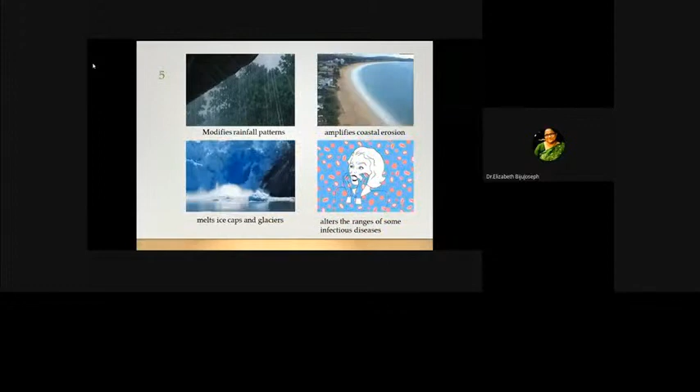Which are the primary greenhouse gases responsible for global warming? Water vapor, carbon dioxide, methane, nitrous oxide, and ozone. The larger the global warming potential, the more a given gas warms the earth.

Anthropogenic emissions of water vapor are small compared to the large evaporative emission of water vapor from the ocean. Methane, nitrous oxide, and ozone have a much larger global warming potential than carbon dioxide. Then why is carbon dioxide so important? It depends on how long it stays—the period the gas is present in the atmosphere. Carbon dioxide stays for thousands of years, unlike the other gases. Therefore, its concentration at a given time increases in the atmosphere as man-made emissions happen.

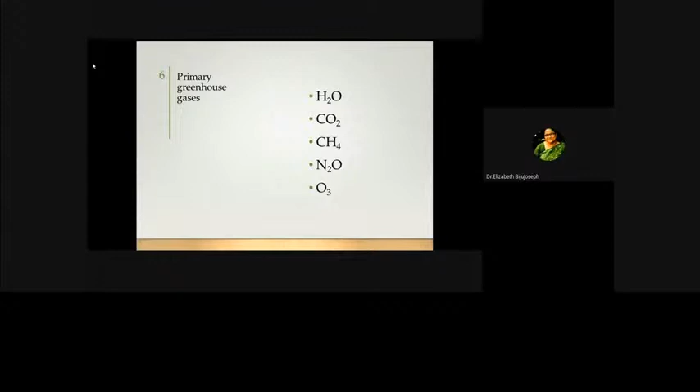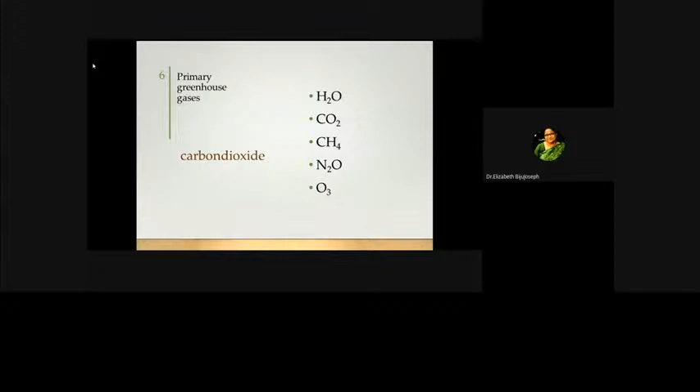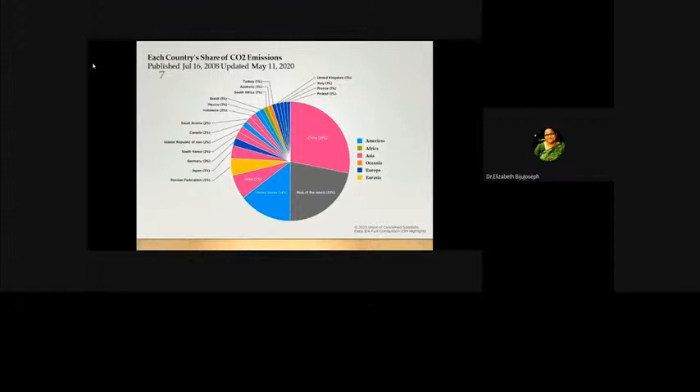Today, we are going to focus on carbon capture from industrial emissions as a way of mitigating the concentration of carbon dioxide in the atmosphere. What are the sources of industrial emission of carbon dioxide? Carbon dioxide is emitted from large stationary sources.

The largest single source of carbon dioxide is conventional coal-fired power plants. Cement manufacture emits around half a ton of carbon dioxide for every ton of clinker. What about refineries? For a 300,000 barrels per day refinery, the carbon dioxide emissions are in the range of 0.8 to 4.2 million tons per year.

The iron and steel industry is one of the largest energy-consuming manufacturing industries. Energy again has to be highlighted—for every ton of steel, around 1.8 tons of carbon dioxide is emitted. Therefore, much effort has been put into the development of technologies for the capture of carbon dioxide from process streams.

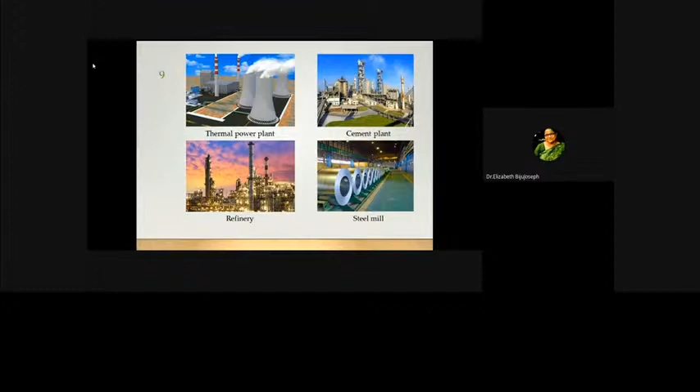The products of combustion of coal from the power plant - we need to prepare steam and to vaporize or evaporate water. The process requires energy, and the energy is supplied from the combustion process. The flue gas, the product of combustion, carries a large amount of energy.

After the energy transfer to the power plant, in the economizer, then the evaporator, the superheater, and finally the air heater, the flue gas which leaves the power plant carries around 14% carbon dioxide. There are other gases along with it.

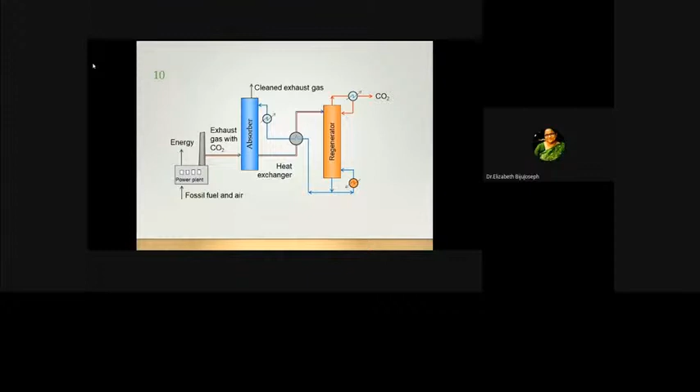This is how an absorber regenerator system would look like. This gives you an idea of the shape and size of the system.

Now let's look at the solvent or the absorbent that can be used. How is it regenerated? As I said a while ago, the most common method is by heating it.

Which are the solvents that I will be using? The solvents may be classified as physical solvents and chemical solvents. What is a physical solvent? A physical solvent is a solvent which absorbs the carbon dioxide without having any chemical reaction, which means the operation is purely physical absorption.

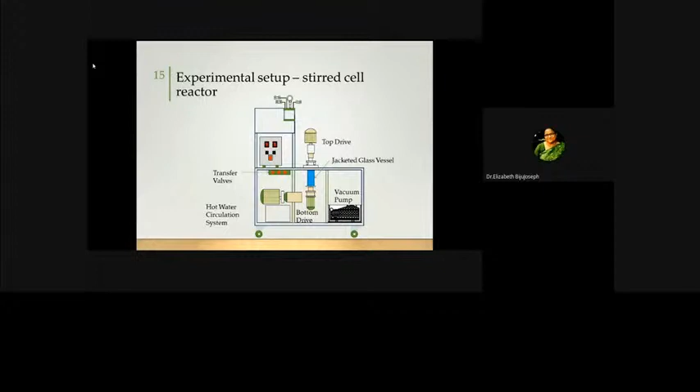These are ionic reactions, and therefore the measurement of conductivity using a conductivity meter ascertains the reaching of equilibrium. If the conductivity reading remains constant for a period of 6 hours, the equilibrium is assumed to have attained. Further to which, the system is switched off - by which I mean the heating and the fan are switched off - and the sample from the liquid phase and the gas phase are analyzed to know the composition of carbon dioxide at that temperature condition, in the liquid phase and the vapor phase. This experiment may be repeated at different temperatures and different loading conditions to generate the vapor liquid equilibrium data.

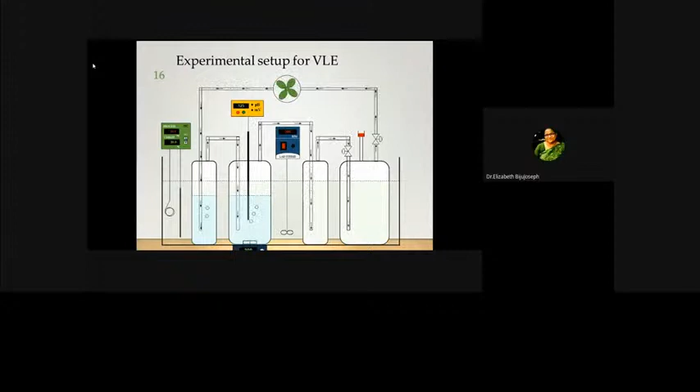Having said all of this, technology of reactive absorption of carbon dioxide for carbon dioxide capture is already implemented in India and abroad. The first carbon capture, storage, utilization plant in India was commissioned in November 2016, capturing carbon dioxide at around $30 per ton, when at the same time the other parts of the world

captured carbon dioxide at almost double the cost. The beauty of this plant is that the captured carbon dioxide is entirely used by the Tuticorin Alkali Chemicals and Fertilizers adjacent to it for their soda ash production. The technology is provided by Carbon Clean Solutions Limited. This is a zero emission plant.

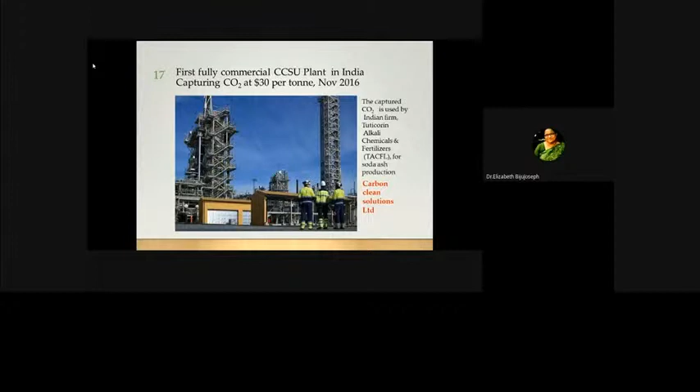Let us look at another one. This is the Shell Cansolv carbon dioxide capture for Lanxess chemical facility, commissioned in October 2013. Lanxess Chrome Chemicals production facility in Newcastle, South Africa is designed to capture 481 cubic meters of carbon dioxide per day. Shell Cansolv has also supplied technology to various other parts of the world where plants are commissioned and some are in progress.

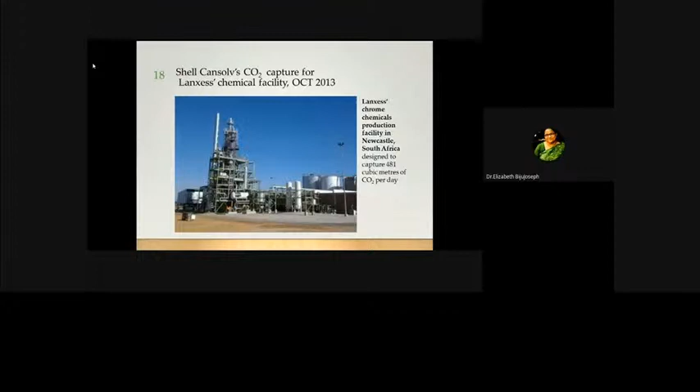Having said all of this, let us look at the carbon dioxide concentration. The Keeling curve by the Scripps Institution of Oceanography at University of California, San Diego, which they generate, has their observatory at Mauna Loa, Hawaii. The Keeling curve gives us the concentration of carbon dioxide. The curve gives us a daily record. The y-axis gives us the concentration of carbon dioxide in parts per million, and the x-axis is the timeline.

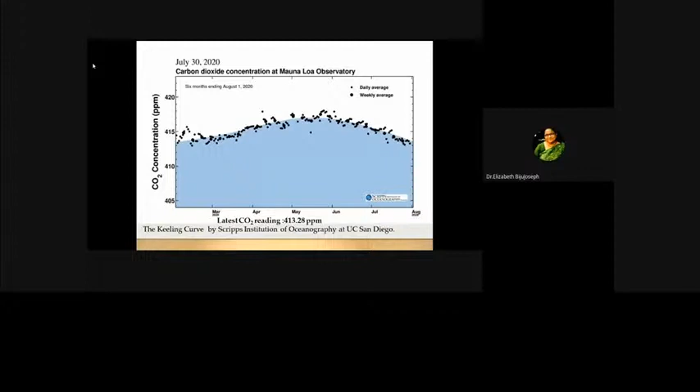This makes us think about the need. With the vertical mobility of mankind, energy consumption has increased and is increasing by the day. Energy production accounts for 80% of the carbon dioxide emissions, I mean the anthropogenic, man-made emissions of carbon dioxide. 80% is due to energy production.

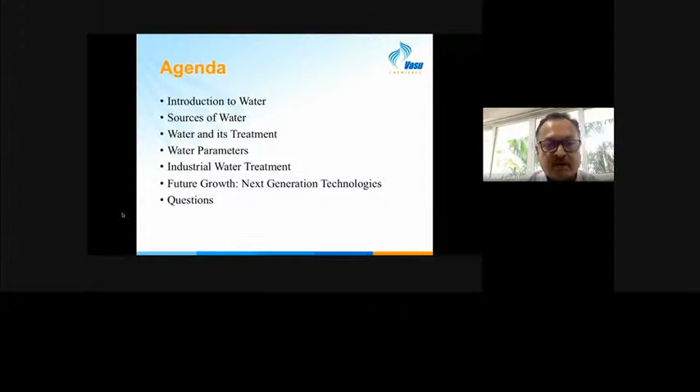Water, like we all know, is everywhere. It is used in municipal, agricultural, and industrial use for a wide range of essential applications. It's the key to our lives. Efficient use of fresh water, management and control of process water, and reuse/recycle of wastewater is the key challenge for India as our population grows and economy develops. This is a very scarce resource and we need to manage it very carefully.

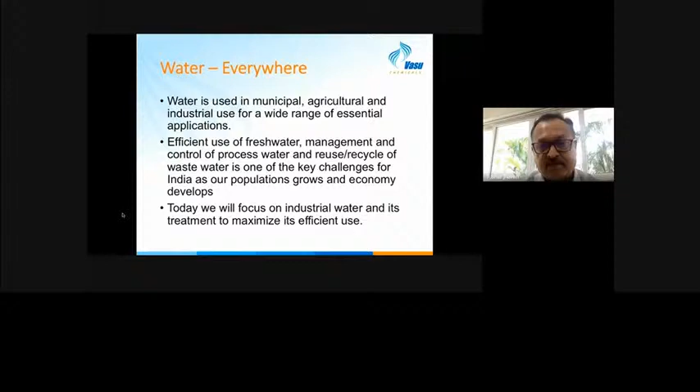Today we will focus only on industrial water and its treatment to maximize its efficient use. Water is used in every single industrial sector, including oil and gas, petrochemicals, fertilizer, power, infrastructure, textile, chemicals, hospitality, and more. It has several uses in the industry, for example for cooling, for steam generation, and is often used as part of the manufacturing process as well as a raw material or as a solvent in the actual process of the industrial unit.

Hence, the treatment of water can be classified into the following for industries: cooling water, boiler water, process water, and waste or effluent water treatment.

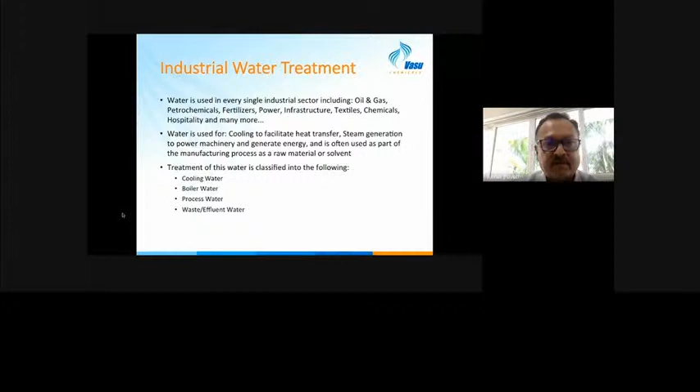We all know the sources of water, but the fresh water source is rain and the water cycle. The rain goes to surface water, which is rivers, lakes and dams, and groundwater, which is the borewell. We also have RO water, which is desalinated seawater, and recycled water from wastewater treatment plants and sewage treatment plants. These are typical sources that an industry would have access to.

The water cycle is most critical, and we are well aware of this. We've learned this since school days: evaporation from the oceans and land goes into the clouds, condensation of the clouds leads to precipitation and rain, and the water runs off with the rivers into the water table and into the sea. This is a cycle that sustains mankind, the source of our lives, and very important for us to survive.

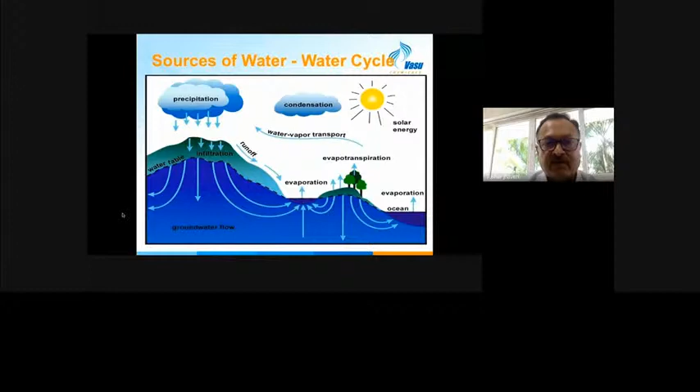Natural water, when it runs through the soil, will have a lot of ionic impurities. River and surface water will have more organic contamination than well water, and all these impurities vary with season, more so for surface water.

If we look at the hydrological cycle, more than 97.6% of the water is in the oceans. The rest is divided into ice caps, glaciers, groundwater, lakes and rivers, and even atmospheric moisture. But primarily our water is all stored in the oceans.

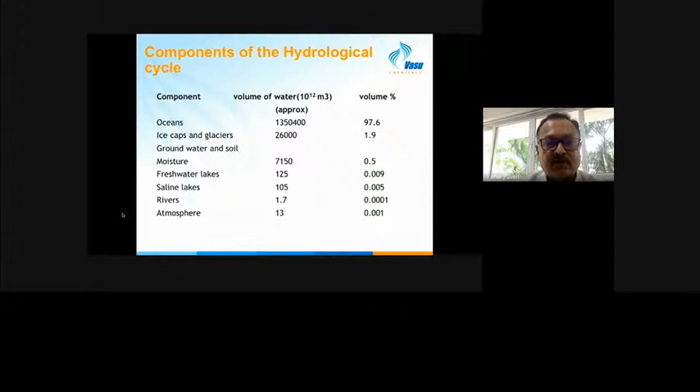If you compare the surface water with the groundwater and the sea water, you will see that the temperature, suspended solids, turbidity, organic oxygen, dissolved oxygen, and salinity vary substantially. These are very important factors when an industry selects its source.

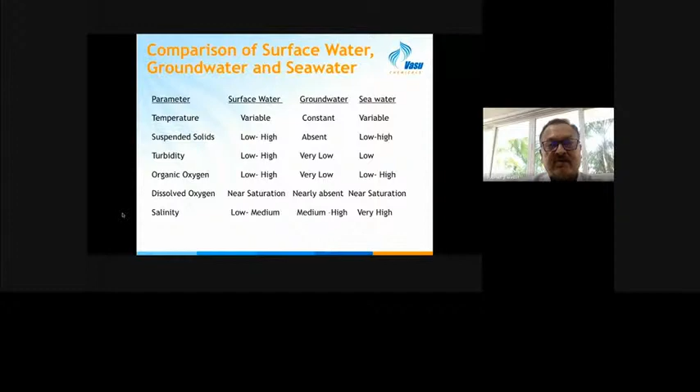Water and its treatment is very critical. Water is a universal solvent, as it is known everywhere. It dissolves salts and gases as impurities, and impurities are present in varying quantities. The nature and amount of impurities in the water imparts different characteristics to the water. This varies seasonally, even within the same source, and poses different problems in different applications.

Hence, water treatment. This is a very vast field that deals with removal of impurities from water and makes it suitable for the end application. Nearly all of these kinds of treatment involve use of some chemical technology expertise and, of course, monitoring. This is very key, and that is where chemical engineering plays a very key role in water treatment.

Broadly we can divide water treatment into different segments. First is the physical part, which includes filtration, clarification, or aeration. There could be external treatment of water, which is disinfection, softening, demineralization, dealkylation, or even reverse osmosis. And then there is the chemical treatment of water, which is something I will talk more about today.

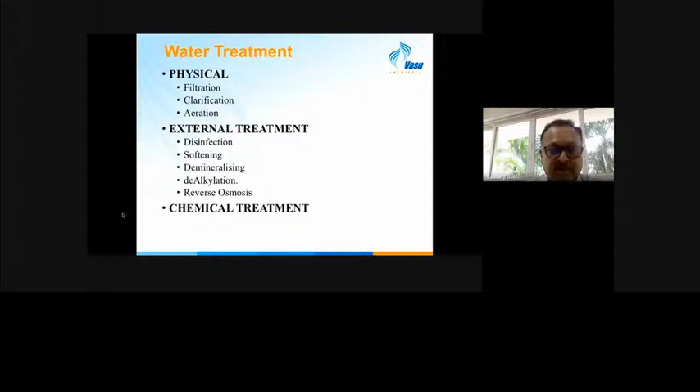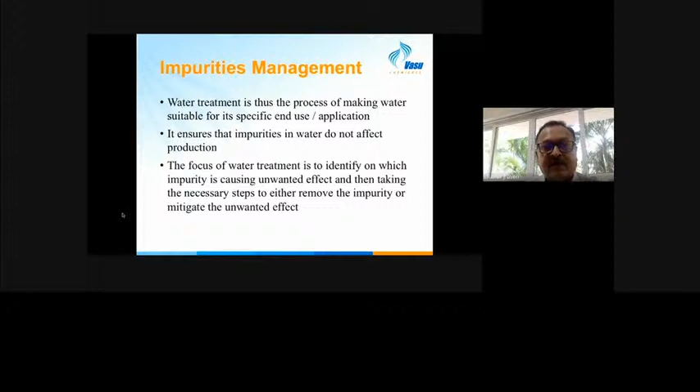Managing the impurities in water is very key, and water treatment is the process of making water suitable for its specific end use. We cannot change the water, but we can change the way it affects our use in the industry, and that is water management. This ensures that impurities in water do not adversely affect the production or operation of the industrial unit. So the focus of water treatment is always to identify which impurities would cause unwanted effects, and then take necessary steps to either remove the impurity, which is physical, or mitigate the unwanted effect, which is typically a chemical treatment. This is how impurities management can be broadly understood.

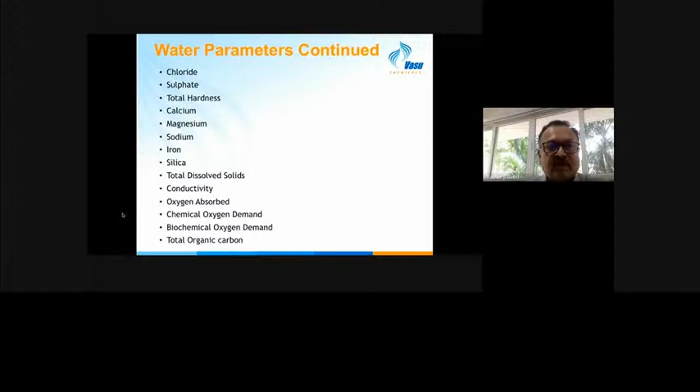So what are the primary water parameters that we would look at when we consider water treatment? Very basic ones: color, odor, taste, suspended solids, turbidity, pH, alkalinity, equivalent mineral acidity, chlorides, sulfates, hardness, calcium, magnesium, sodium, iron, silica, TDS, conductivity, oxygen absorbed, COD, BOD, total organic carbons. I will touch on a few of these critical parameters that play a significant role in industrial water treatment.

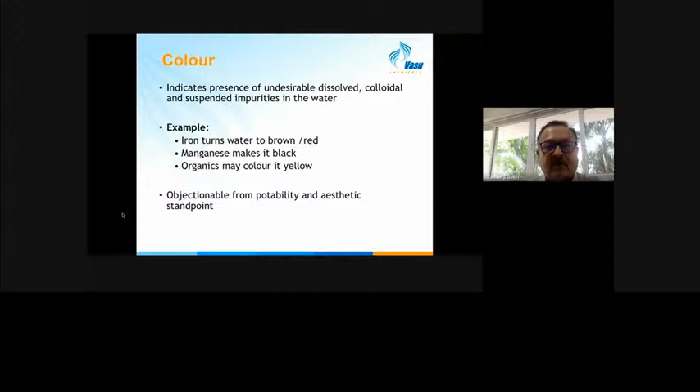Color is very important because it indicates the presence of undesirable, dissolved, colloidal, and suspended impurities in the water. For example, if there is iron present in the water, you will see a slightly brownish or reddish tinge. Manganese would make it black, and if you have organics, there will be a slight yellowish tinge. Color is important because it gives an aesthetic value to the water and also potability. If you had water with slight coloration, you would never drink it, right? So color of the water is very important for it to be clear and transparent for use.

Odor and taste are also very important because they indicate undesirable impurities, maybe such as hydrogen sulfide or sewage contamination. This is an important water parameter, especially in the food and beverage industry. They don't want the water being used to impart any odor or color to the final food that is being produced in the industry.

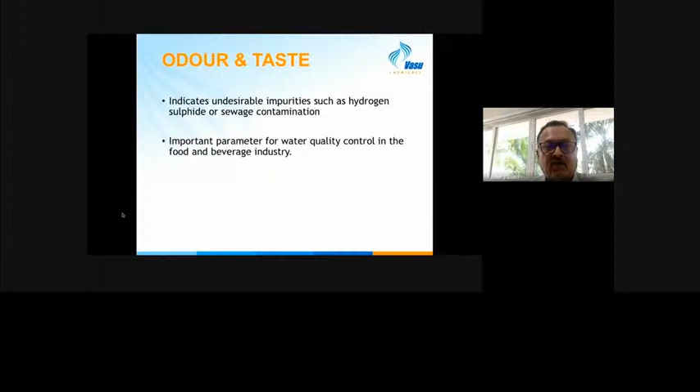All matter suspended in water large enough to be retained on a filter paper are called suspended solids. These are the undissolved solids in the water.

Turbidity indicates the extent of cloudiness or muddiness of the water. It is caused by the suspended and colloidal matter, which can be of inorganic or organic origin, but something that hinders the passage of light causing turbidity. This is also a very important parameter used in water treatment.

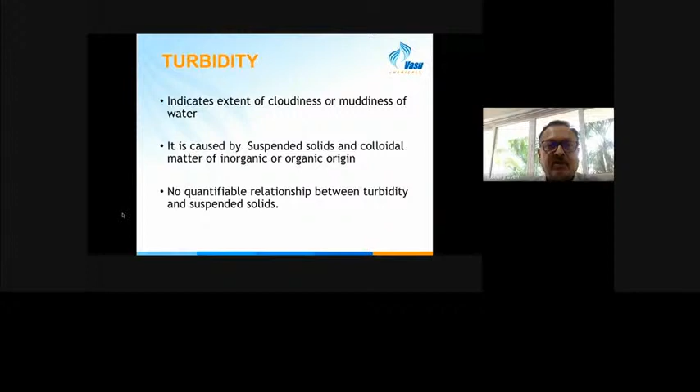Total dissolved solids are the total content of the dissolved matter in the water. It represents all the charged ions and also the uncharged and molecular species of the same. As a summation, you can say the cations, mainly calcium, magnesium, sodium, and anions would be bicarbonates, chlorides, sulfates, and silica.

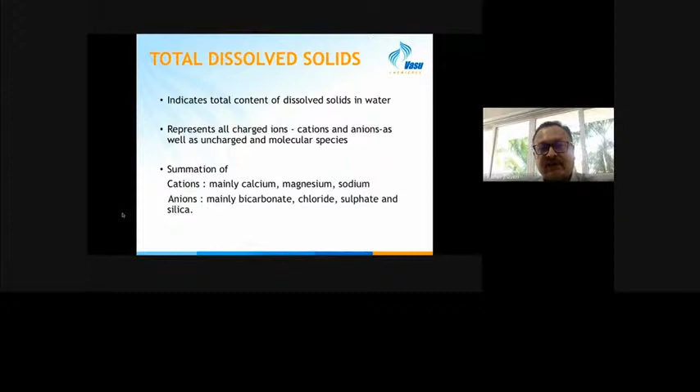Conductivity is also a very quick and important measure. It is a true indication of the purity of water. Higher the conductivity, higher the content of ions, and higher the impurities of the water, and vice versa. An empirical formula does exist between electrical conductivity and total dissolved solids, and this conductivity is also very temperature sensitive and important, affecting the corrosivity of the water.

pH is another basic parameter. We have all learned this, we have all analyzed this in the lab. It's a well-known parameter of water. Water dissociates into H and OH minus, and negative logarithm of this is the pH scale, an empirical scale from 0 to 14, where 7 is a neutral point, below 7 is the acidic area, and above 7 is the alkaline area.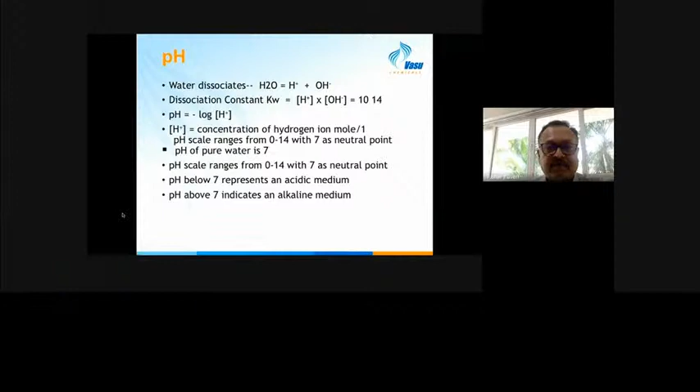Alkalinity indicates the quantities of bicarbonates, carbonates, and hydroxide in the water, or the alkaline salt content of the water, as it is sometimes referred. It is the amount of acid necessary to neutralize the carbonates and bicarbonates using two indicators, phenolphthalein and methyl orange. Hence we have the methyl orange alkalinity, or M alkalinity, or we also have the P alkalinity, which is the phenolphthalein.

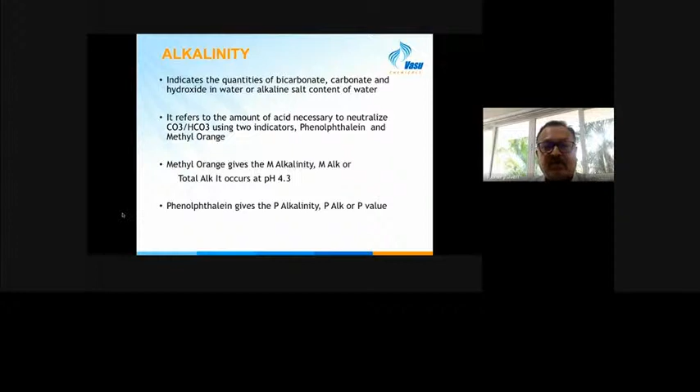This is a neutralization curve which shows us where the alkalinity stands, where the P alkalinity stands. P alkalinity starts at about 8.3, 8.2, and M alkalinity is at 4.2. So we can see that below 4.2 is the free mineral acidity region, and above 8.3 is the regime where you have more of the hydroxides. This is a very important curve used in industry to understand what kind of ions are contributing to the alkalinity in the water.

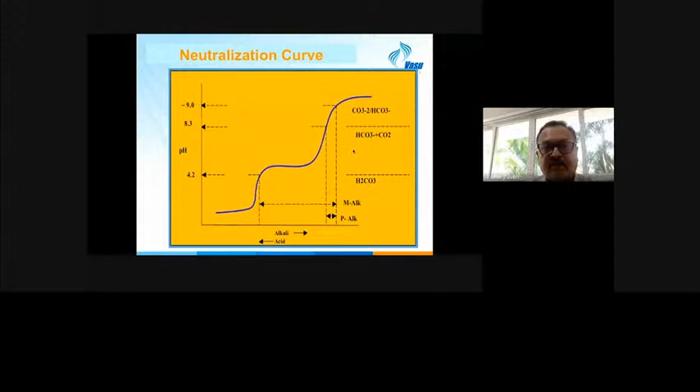Total hardness again is very important. It helps us to assess whether the water is alkaline, whether the water has soft water or hard water.

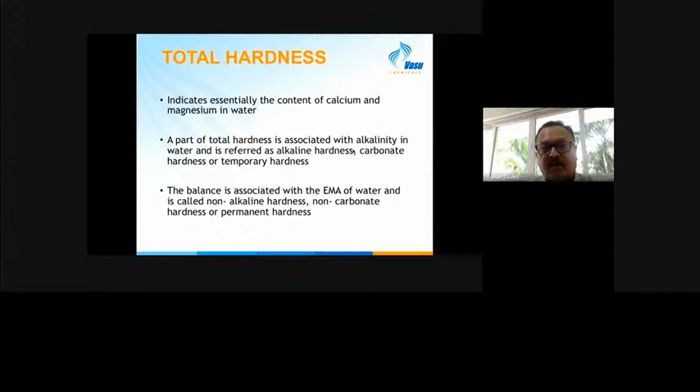Part of the total hardness is associated with alkalinity in water and is referred to as alkaline hardness, carbonate hardness, or even temporary hardness. The balance is associated with the mineral acidity of the water and is called non-alkaline hardness or permanent hardness. This is again very important for selection of water sources.

Organic matter plays a very important role and impacts water usage everywhere. It covers all substances in water susceptible to oxidation and is expressed by various indices, some of which are commonly used in industry, like COD and BOD. COD indicates the organic matter oxidized by acidified potassium dichromate and covers the majority of organic compounds and oxidizable mineral salts.

Whereas BOD represents the amount of oxygen consumed by microorganisms degrading biodegradable matter in wastewater under aerobic conditions. Generally, for BOD analysis, the sample is incubated for 5 days and the result is reported as BOD5, the 5 being in subscript.

We now come to the various types of industrial water treatment: the cooling water, the boiler water, the process water, and the wastewater.

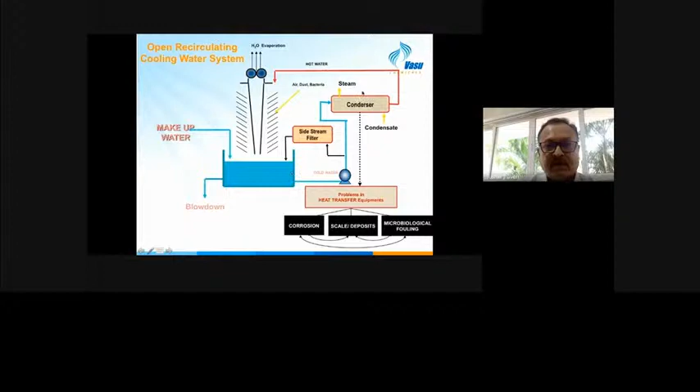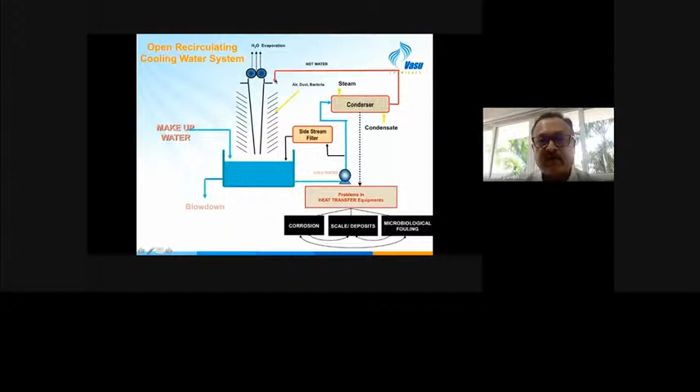This is a typical schematic of the cooling water circuit. As you can see, this part represents the cooling tower. The cooling tower has makeup, it has blowdown, and it has evaporation from the top. This cooling water is pumped through the recirculating water pumps into the plant where the heat exchangers are, and the cooling of the process fluids takes place. The hot water coming out of the heat exchangers goes back to the top of the cooling tower for cooling and is again recycled. That's why it is called a recirculating type of system.

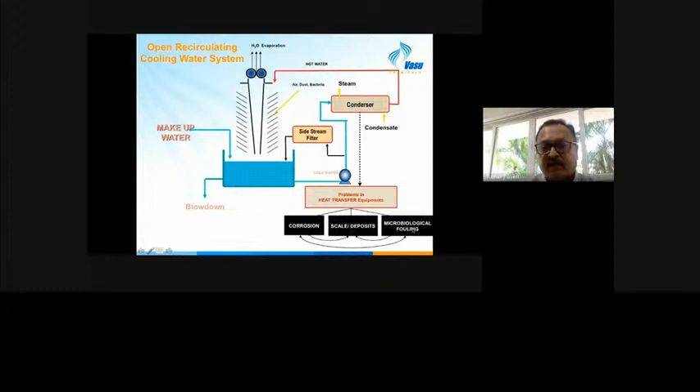While recirculating, there are a lot of problems associated with this water, and these can lead to problems in heat transfer of the equipment in the plant, including corrosion, scaling, and microbiological problems. These are both interdependent and interinfluencing, and it is important for any industry to ensure proper control of these problems to ensure optimum usage of the cooling water circuit.

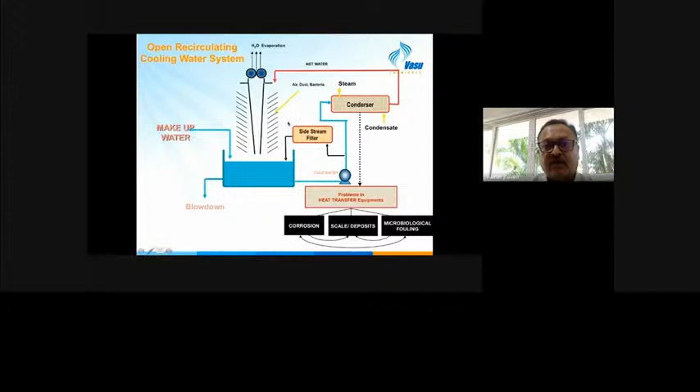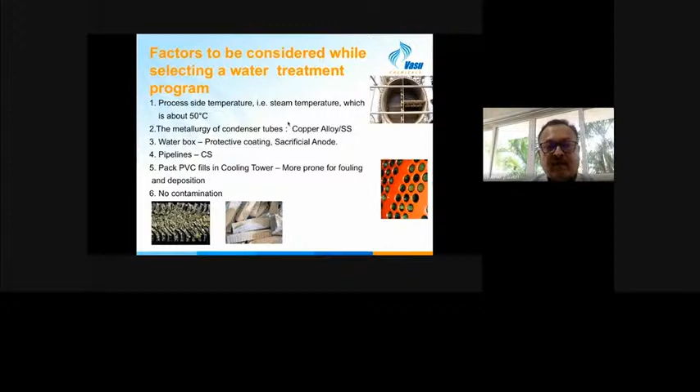These are the factors that are important which need to be considered while selecting a water treatment program: the process side temperature, the metallurgy of the heat exchangers, the water box, the pipelines, and the fills in the cooling tower. The fills are the packing where heat transfer takes place between the hot water and the air. And of course, there should not be any contamination coming into the cooling water system.

So we first talk of corrosion prevention in cooling water systems. The most important aspects are selection of proper metallurgy, sacrificial anodes, coatings, and use of corrosion inhibitors. All four are important, and depending on the type of metallurgy, plant, and the kind of economics that play a role in the selection, a proper program can be made.

The corrosion process is well known. It occurs due to the presence of local cells with anodic and cathodic sites on the metal, mediated by electron transfer through an electrolyte. This is something we have studied from our school days, and this process is very well established, researched, and understood, with different types of treatments available to mitigate it.

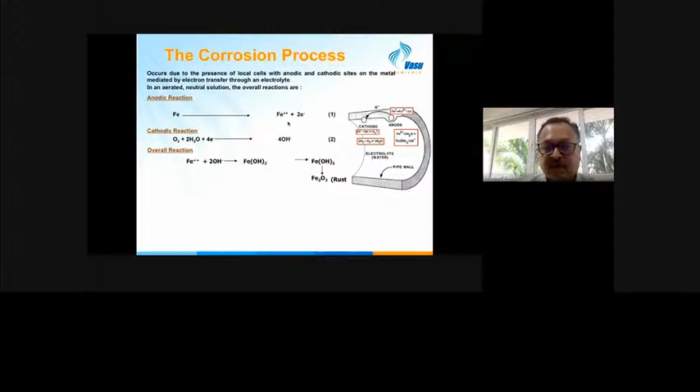This includes anodic inhibitors, which are chromates, nitrites, orthophosphates, and molybdates, or cathodic inhibitors like phosphates, zincs, and controlled deposition of calcium carbonate.

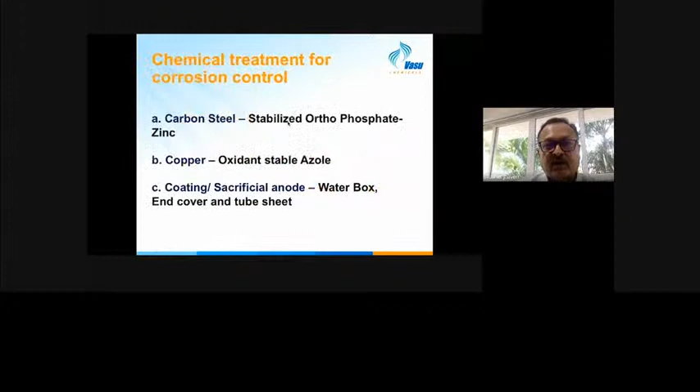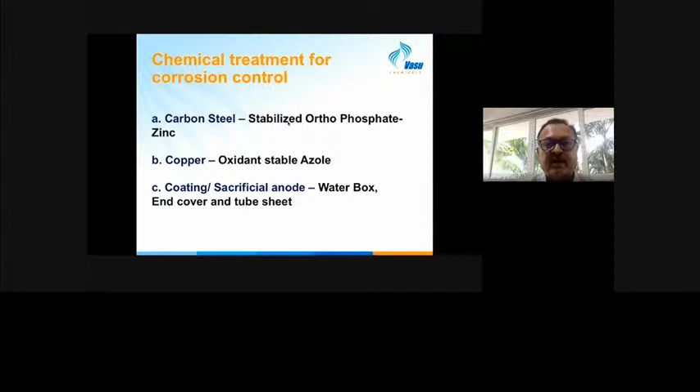Chemical treatment for corrosion control again depends on the metallurgy. For example, for carbon steel, the typical programs used are stabilized orthophosphate zinc. For copper and copper alloys, oxidant stable azoles are used, and for sure, coatings and sacrificial anodes are used in water boxes, covers, and tube sheets.

The next problem in cooling water systems is scale formation. These are dense, adherent and hard materials composed mostly of calcium and phosphate salts, but usually heterogeneous in nature, and they can precipitate on the heat transfer surfaces and become very hard.

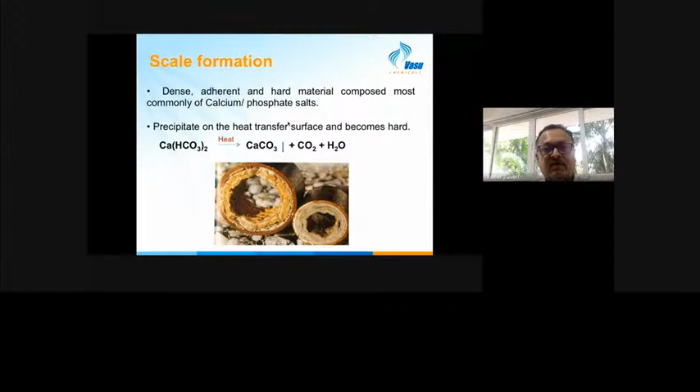Some types of common scales encountered are calcium carbonate, tricalcium phosphate, and iron phosphate. Magnesium silicate scales are very hard deposits, very difficult to clean. Magnesium carbonate is more uncommon, more rare to find.

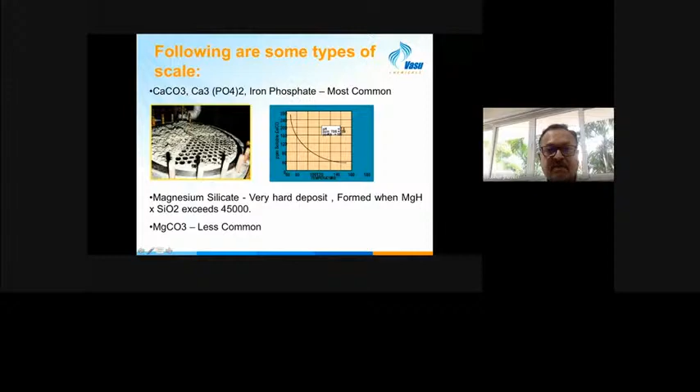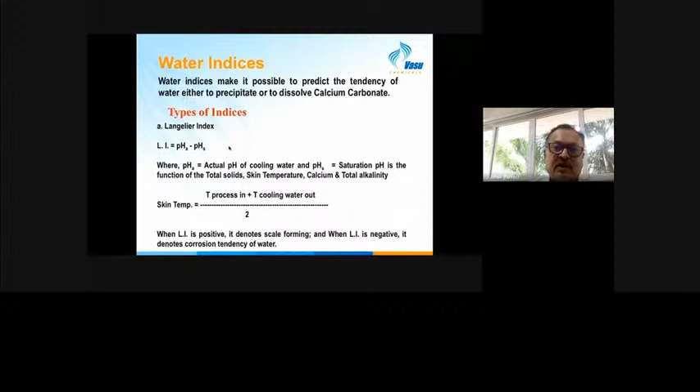Water indices are also used to evaluate the scaling or corrosive tendency of water. It's a predictive tool, very interesting to water treatment engineers, because it helps them select the correct treatment and the correct application of the chemicals.

Scale control is very important. It can lead to reduction in water flow, like I showed you in that other photo, poor heat transfer, reduction in plant load, and will require frequent chemical cleaning and possibly unscheduled shutdown if the tubes get choked and cooling is not happening. For sure, it will shorten equipment life, because under the scaling you will have more corrosion, heat transfer restrictions, and water flow restrictions. So scale control is very, very critical.

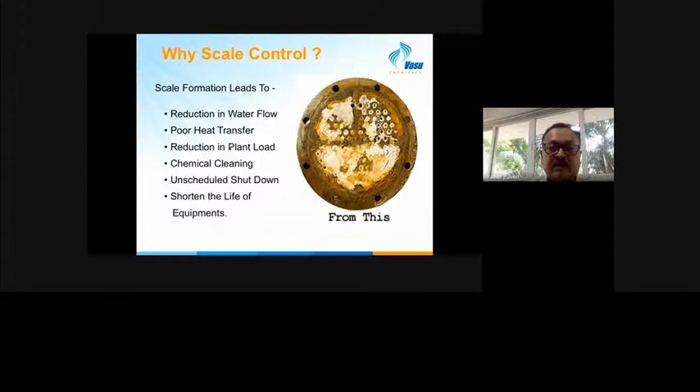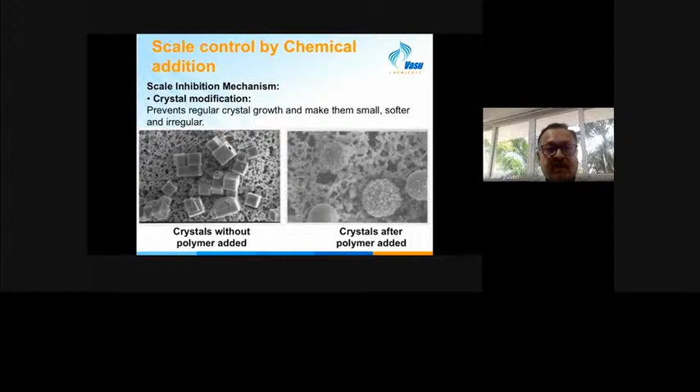There are several ways to do scale control. You have physical methods like softening, and chemical methods which include crystal modification, which prevents regular crystal growth and makes crystals small, soft, and irregular, preventing agglomeration. This is an SEM photograph showing you the difference between crystals with and without polymer added.

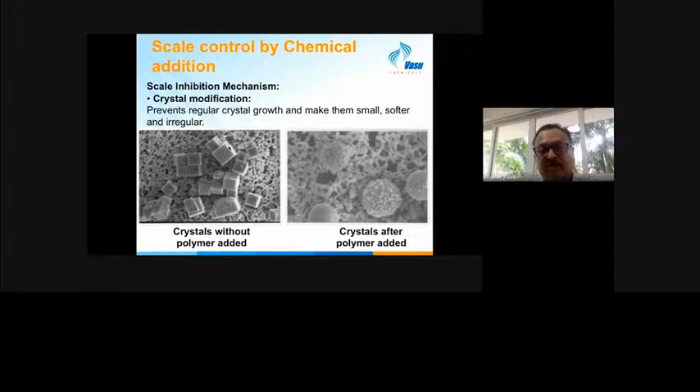The mechanism is usually either of the dispersion kind, or you can also have threshold inhibition. Dispersion is the more common type used in industry. Basically, it changes the charge of the particulate matter so that the particles repel each other and do not have an opportunity to agglomerate. So this is the normal method used in industry for scale inhibition.

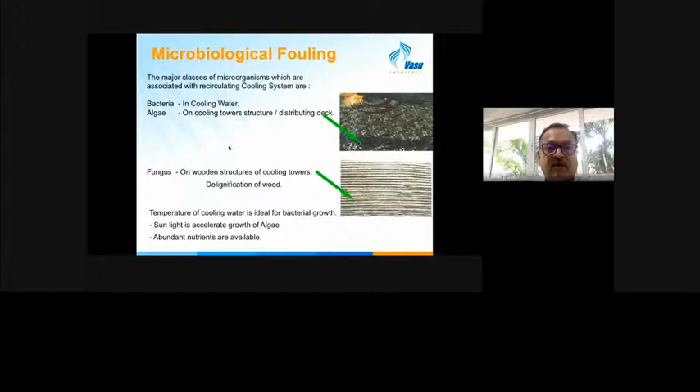The third important problem in cooling water treatment is microbiological fouling. The major classes of microorganisms associated with recirculating water systems are bacteria, which is in the water, and algae, which grows on the cooling tower structure and distribution deck, primarily because it is exposed to sunlight, with photosynthesis occurring on the structure.

This kind of algal growth is a very common sight in cooling towers. Fungal growth can also happen if you have wooden structures in the cooling towers, which can lead to delignification of the wood. Mostly now cooling towers are made of PVC fills, so this is becoming more rare. But in older cooling towers still in use in industry, where wooden structures, louvers, etc. are used, fungal growth is to be monitored.

Microbiological fouling and growth is very important in cooling water systems, particularly because a cooling tower is very conducive for microbiological growth because of the temperature in which it operates, the sunlight that is available, and the abundant nutrients that are also there in the circulating water. All these make microbiological proliferation in cooling water a very common phenomenon.

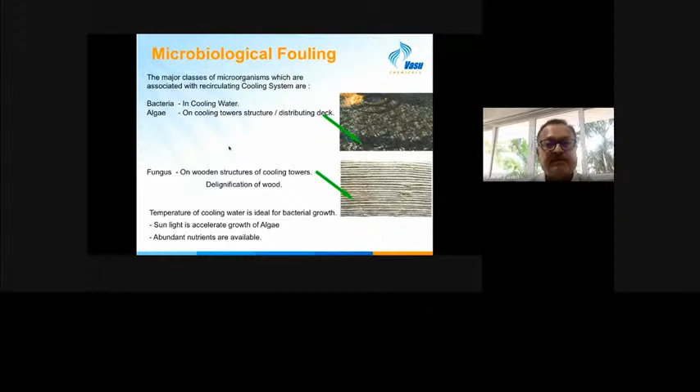So what are the different types of bacteria that we find in cooling water systems? This is actually different from potable water bacteria typically found, because these are generated in the cooling water system. Again, there are two types: one is the anaerobic type, which thrive in the absence of oxygen, and the aerobic type, which need oxygen to survive. The anaerobic type are like the sulfate-reducing bacteria, and these typically are under a deposit.

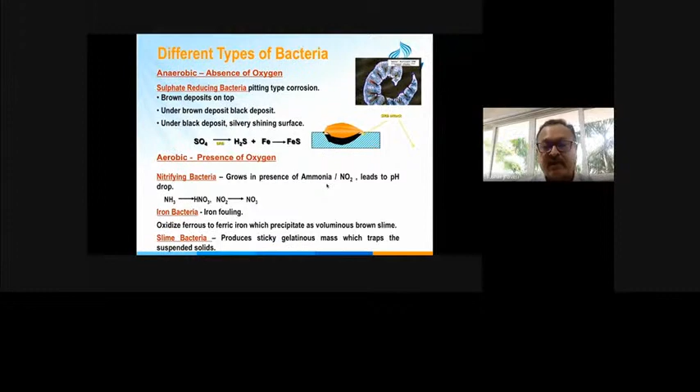The aerobic bacteria include the nitrifying bacteria, the iron bacteria, and most important are the slime-forming bacteria, because they form a very sticky gelatinous mass which traps the suspended solids and even other bacteria, protecting them from the treatment chemicals. Further, the slime-forming bacteria also have an insulating effect.

If you see the biofouling, that is where this topic will be discussed more. The two broad classifications of bacteria include the sessile, which are the ones that get attached to surfaces. Over 95% of the bacteria in the cooling water system are sessile. They live in the biofilms, which I explained earlier as biofouling, which forms with these slime-forming bacteria.

Now, the challenge here is monitoring, because when we take a sample of water and analyze it, what we are analyzing is the planktonic type, whereas the problems which are caused are more by the sessile bacteria. This is one of the largest problems in cooling water systems, monitoring of cooling water systems, and something we need to be very careful about.

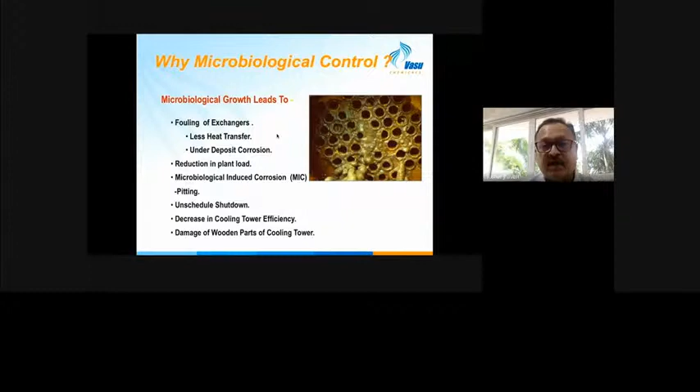It also leads to under-deposit corrosion, which can reduce plant operating loads. It can lead to pitting corrosion, unscheduled shutdown. It will reduce the cooling tower efficiency, and it will damage the wooden parts in the cooling tower.

So how do we control microbiology? We have two types of product ranges for that. One is the oxidizing biocides like chlorine gas, which we use - even our municipality uses it for disinfection of domestic water. There is also sodium hypochlorite, which people are spraying during this time of COVID. There is bromine, ozone, and chlorine dioxide.

There are also non-oxidizing biocides, which are shock dosed on an intermittent basis. These include organosulfur compounds, quaternary ammonium compounds, aldehydes, DBNPA, and carbamate compounds. A lot of different chemistries are available, and that's a deep science to understand which is the correct biocide for a particular application, requiring a lot of understanding and monitoring of the water system.

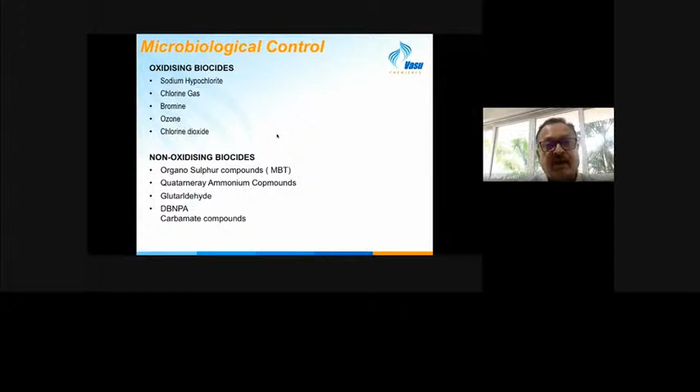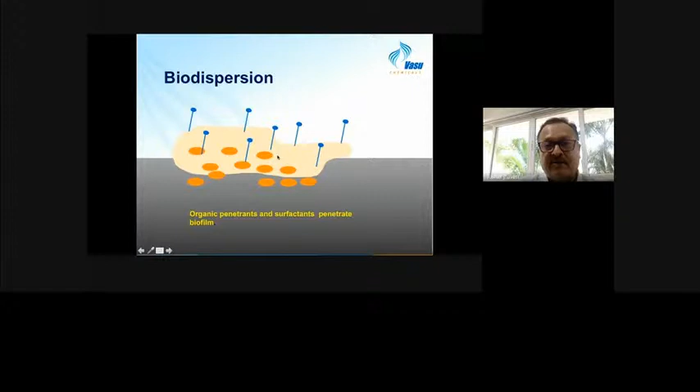You can see that over time, if the product is working well, it will break up the biofilm into smaller parts which come into the water phase, where it can be killed with the chemicals that are there in the water. So the removal of the biofilm and release of the trapped bacteria in the bulk water is very important. Unless the biofilm is loosened and removed, the bacteria will continue to thrive.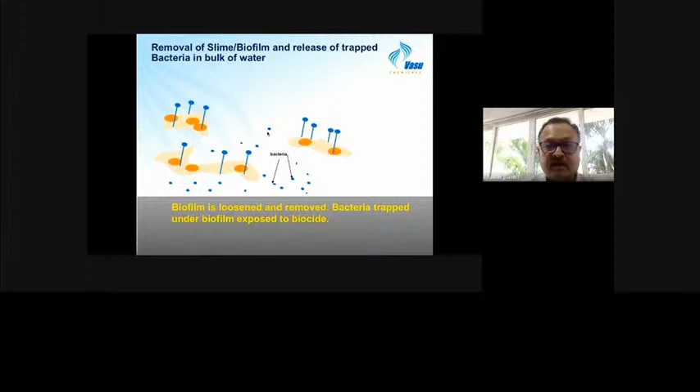So that was a very brief discussion on cooling water treatment. The next is the boiler water treatment.

A large part of water used by industries is used in boilers to generate steam, which is required in industrial processes. There are many types of boilers, but I have just broadly divided them into 3 types. There are many more, like I said.

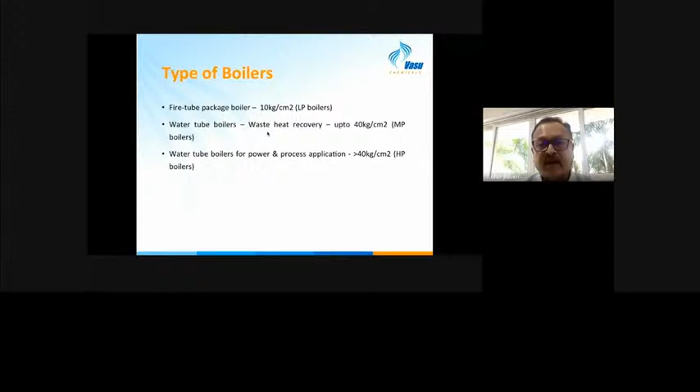You have the fire tube package boiler, which is a low pressure boiler. Then you have the water tube boilers, which are the waste heat recovery boilers, and these are the medium pressure boilers. These are typically found in most large industries because they help recover waste heat as well. And then you have the water tube for power and process applications. These are the high pressure boilers, typically used in power plants.

So what are the general problems that we have with such steam generating boilers? In the low pressure boiler, the problems are obviously diminished. We all have corrosion because of dissolved oxygen in the condensate lines, damaging the boiler and ancillary plant. There will be scale, leading to tube overheating and failure. There will be sludging, where the drum becomes dirty.

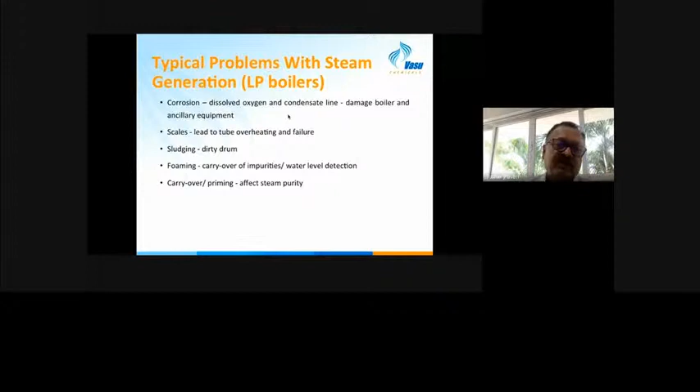There will be foaming, so there will be a carryover of impurities along with the steam. It's not pure steam, it becomes wet steam and creates more problems, which is called carryover and priming, affecting the steam purity.

In the medium and high pressure boilers, problems are even more pronounced, including oxygen corrosion, caustic corrosion, caustic embrittlement, hydrogen damage, acid phosphate corrosion, condensate corrosion, corrosion product deposition, and silica carryover.

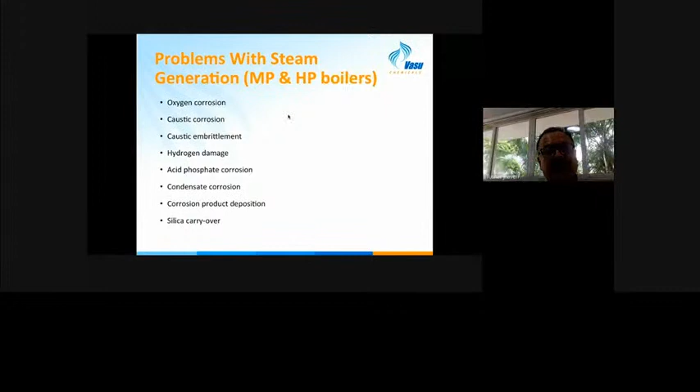Each of these problems has a solution. Each needs a specific operational conditioning so that the boiler is operated safely and correctly, so these problems are not encountered.

Several types of treatment programs exist, starting with physical treatment, where it is important to maintain a proper makeup water source. If it is a softening plant or a DM plant, or a DM plant based on reverse osmosis, it is important to ensure correct operation so that we do not have slippage of unwanted ions into the boiler water system.

Proper operation of the deaerator is also very important because this ensures the boiler drum is safe and operating correctly. Oxygen scavengers are also added, which reduce dissolved oxygen and hence corrosion. Scale inhibitors are added to reduce sludging inside the boiler drum. An alkalinity booster for pH control in the boiler for proper balance is also common.

In the condensate line, a corrosion inhibitor can be added, because that line from the condensate tank to the makeup line is extremely prone to corrosion, since the condensate water is usually very corrosive. And of course, the water chemistry needs to be controlled, such as silica, pH, alkalinity, etc.

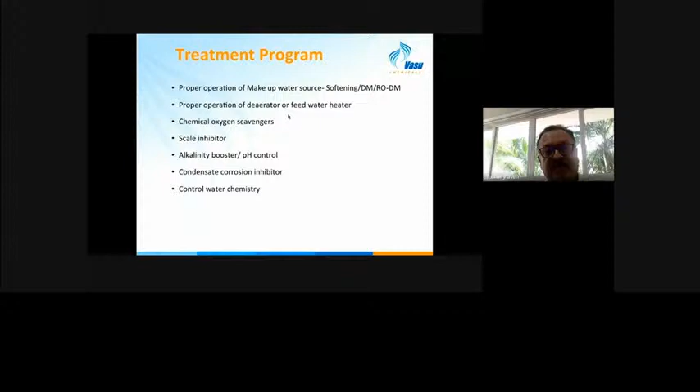Next is process water treatment. This is again a very wide field and it changes from industry to industry because each industry has a different need and application of process water in its manufacturing. The process water treatment is usually designed specific to and tailor-made for each industrial process or subprocess. The treatment is designed to meet specific objectives of the plant, which could include quality targets, reduction in operating costs, and improving heat transfer. Examples of industrial processes that require these kinds of special treatments are steel plants, oil refining, coal washeries, textiles, and dyestuffs. These are some of the industries that have a large usage of such water.

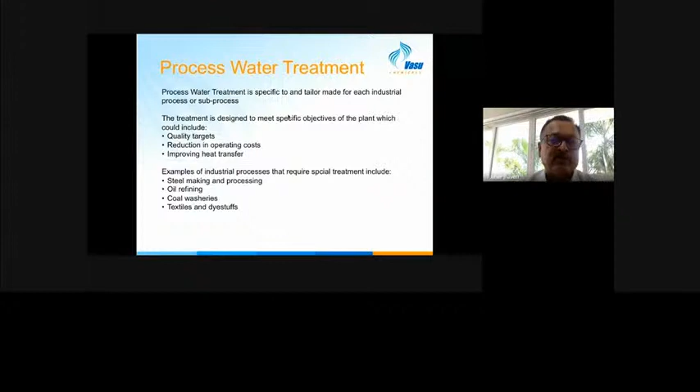In steel making, there is direct cooling where once the molten steel is converted into billets or slabs or wire rods, they have to be cooled with direct water spray, and that water gets contaminated with the steel and iron particles. So it requires a very special type of treatment. That's process water treatment, and it can be discussed specifically for each industry, depending on the challenges being faced.

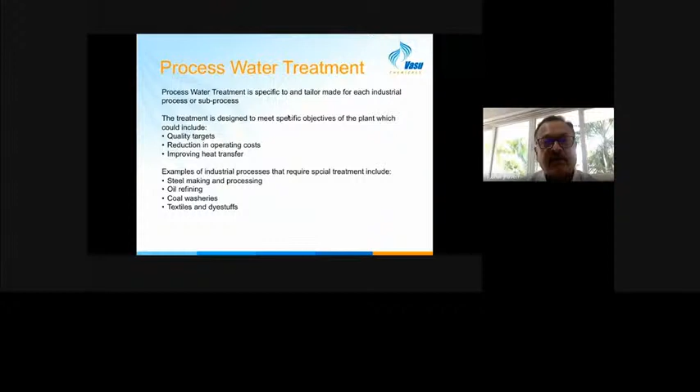Last is the wastewater treatment, and we all know why that is very critical. It addresses environmental concerns and an awareness that is increasing every day, and it is important to ensure good wastewater treatment so we don't pollute our environment. There is a huge water scarcity, so its treatment and recycling is important. Quality of life is affected also by wastewater treatment because it can affect our drinking water sources, agriculture, and our recreation and fishing lives.

Industrial reasons are many for wastewater treatment. There are a lot of stipulations by government and pollution control board authority on the quality of water discharge from an industrial unit. So prior to discharge, it is important to have proper treatment so there is no violation. There can be economical reasons too, since reuse of water can be a huge cost saving by reducing fresh water usage. There can be social reasons also because the cost to discharge can be high. The discharge consent limits and ZLD, the zero liquid discharge compliance - many places in India now have this ZLD compliance requirement. And the image of the industrial unit is an important factor too. If they are not discharging good quality wastewater into the environment, they will have a problem for their reputation and sustenance in that geographic area.

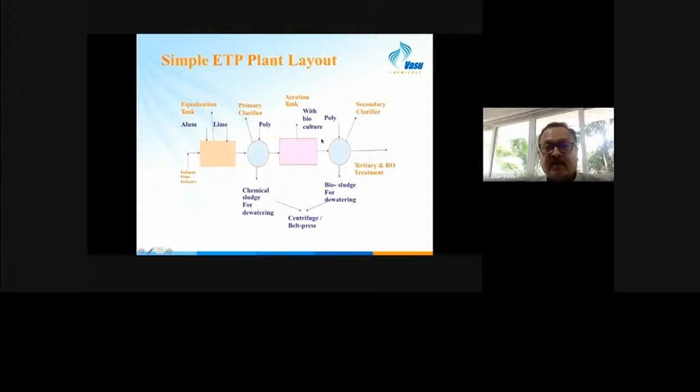After the secondary treatment, the wastewater goes to the secondary clarifier, where all the suspended matter and other biological components are removed, and the biosludge again goes for dewatering. The clear water is then sent either for discharge if it meets environmental compliance, or if it has to be reused, it goes for tertiary treatment, which typically involves a reverse osmosis plant to reduce the TDS and bring the water back to almost its original quality. So this is a typical layout of a wastewater treatment plant in an industrial unit.

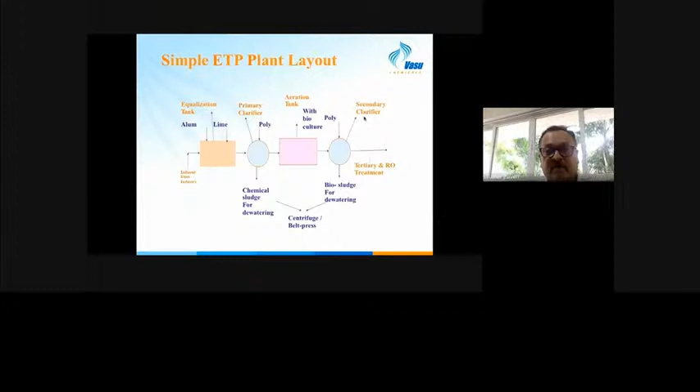So this is the chemical treatment, which is primary, the biological treatment, which is secondary, and the tertiary treatment, which is reverse osmosis, and the sludge handling, which is dewatering. This completes the presentation on the four types of treatment: cooling water, boiler water, process water, and wastewater. Each of these topics is a topic by itself and needs a lot of study and understanding, and it varies from industry to industry. So it's a very wide and vast field requiring versatile knowledge and application techniques.

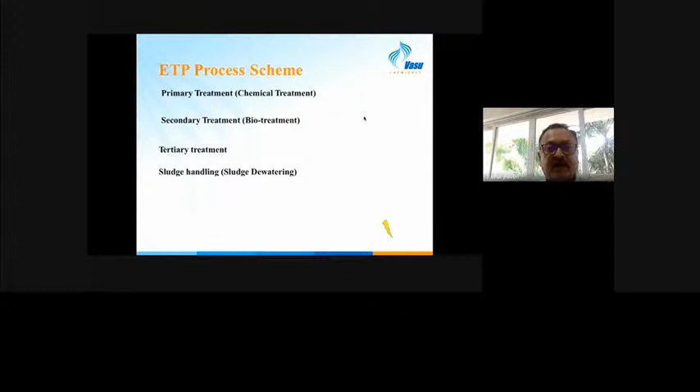So what is our future growth? What is the next generation water technologies? Many times people are asking us, where does India stand as compared to the rest of the world? What is the research going on in water? How do we save usage of industrial water? How do we ensure discharge of industrial water is not affecting our environment and our future generations?

So what are the growth drivers for the future? That is important for us to understand. There is a lot of investment happening in developing newer water technologies, which is driven by rising population and increasing demand, which is all leading to a scarcity of water.

Pollution, climate change, and environmental concerns are also very important to us now. The digital revolution is also driving a huge change in the way water treatment applications are employed by the industry. For example, there are a lot of low-cost sensors, meters, and monitoring technology, so that remote monitoring of water quality can be done. Large volumes of data are analyzed by artificial intelligence and machine learning systems. These are playing a very key role, and I think this is going to be the future, not only in India but all across the world.

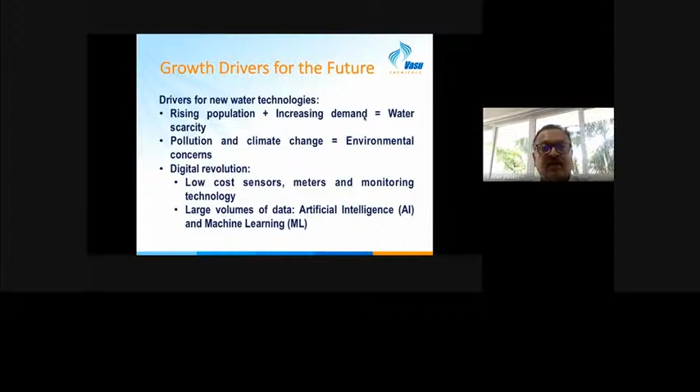So some of these areas where these new technologies are being applied and newer processes are being developed, not only in industrial R&D divisions but also in universities and private research labs, include reverse osmosis, desalination, and sewage and effluent water reuse and recycle. Very, very important. We now have many smart cities where sewage water is treated by the municipality and brought to a more acceptable level and then sold to industry.

One of the biggest and most successful examples of this would be Chennai city, where most of the sewage and effluent water is recycled and very well treated by the city, so that the water scarcity impact is diminished. There are a lot of other smart cities as well in India which are either on the road to this kind of reuse and recycle or have already achieved that. So it's a very encouraging battle that we are fighting to combat water scarcity.

The environmental concerns and the technologies to address them are also important. This will require enhanced effluent treatment and disinfection, because if it is going to come in human contact, then we definitely need to ensure that it is well disinfected and the water quality is fit for human consumption.